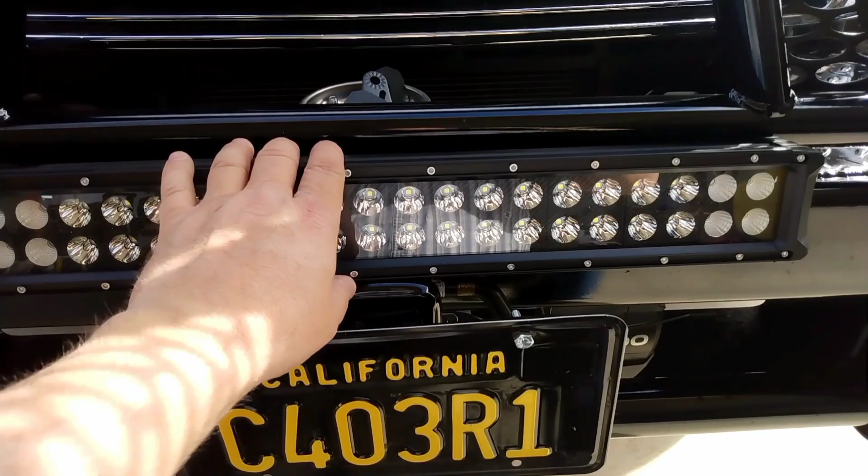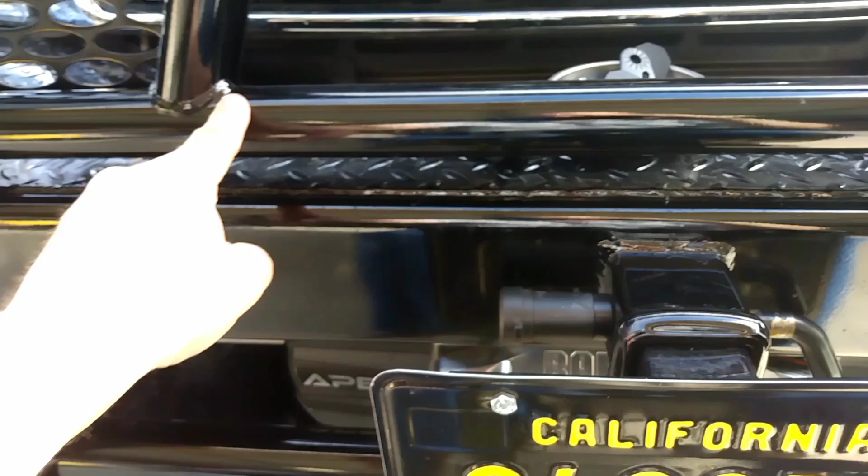Figure out a way to mount it to this. I don't want to drill into here. There are no mounting locations for a Lightbar on this. Kind of curious why they didn't design it with some sort of universal Lightbar mounting tabs. I don't know.

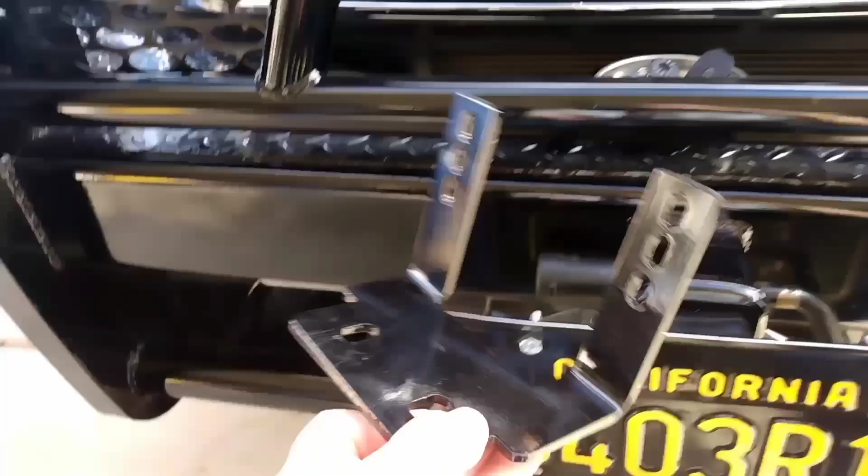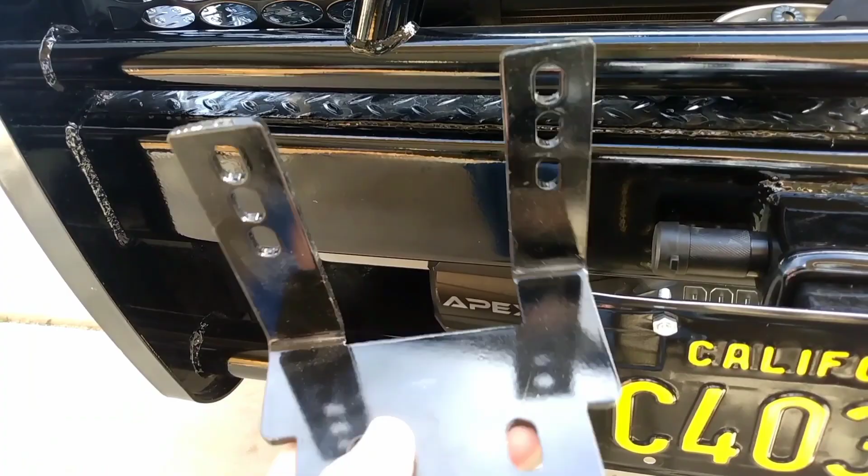Okay, this is all the parts that it came with. Well, let's just leave them right there for right now. So my thought is, I have these leftover brackets. Now these brackets were meant for the LED fog lights. It's a special mount for the LED fog lights. I don't have LED fog lights, so I don't need them.

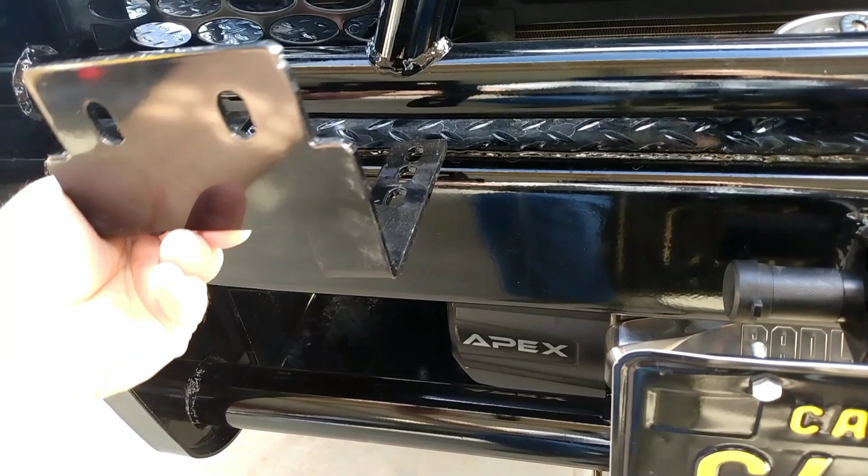So I'm thinking about notching. This would make a nice little L bracket. And then I could notch a little piece. Of course, I'm just going to cut this off. And then it would make a nice little L bracket. I could bolt it to here on either side, and it just might work. So that's my thought on that.

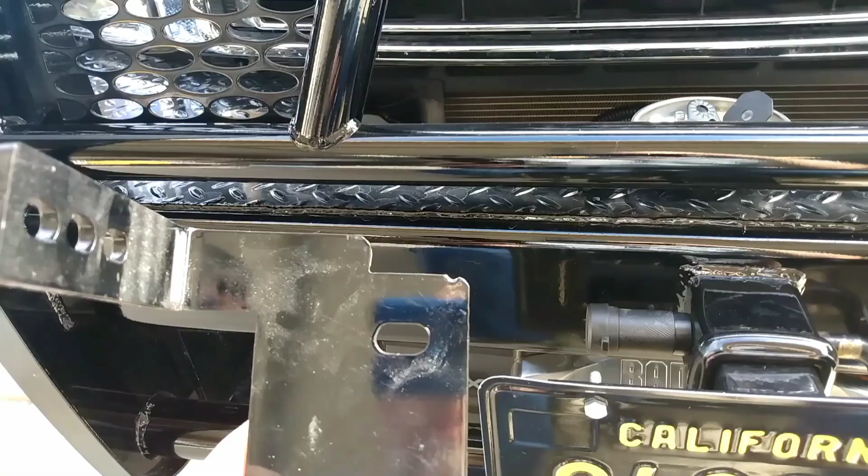So let me get going on doing that, and I'll be back.

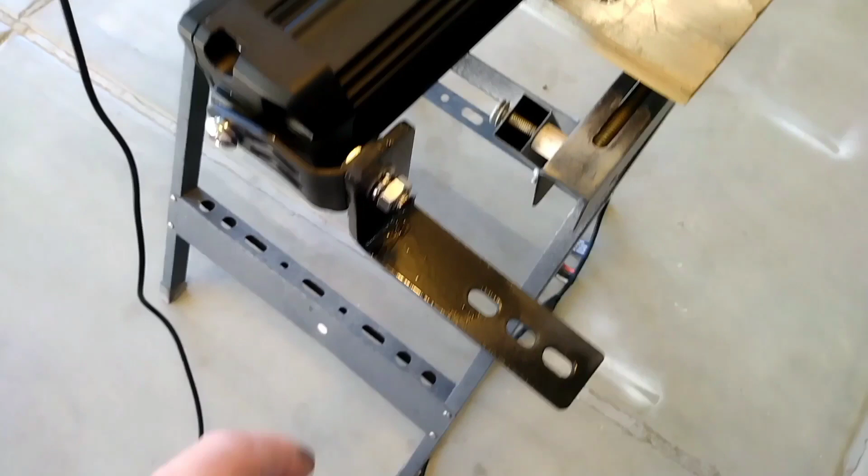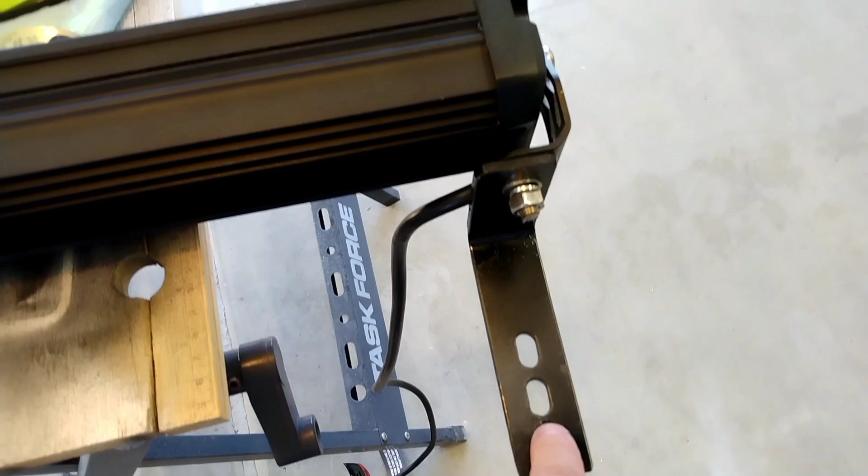Okay, so here's what I have fashioned. These are the bracket pieces that I cut out of the leftover brackets from the bumper install, and then I've installed them to the brackets that came with the light. And then I'm going to drill a hole in the bumper and then bolt this to the bumper. Same on the other side, and it should go in just right. All right, it's all bolted up.

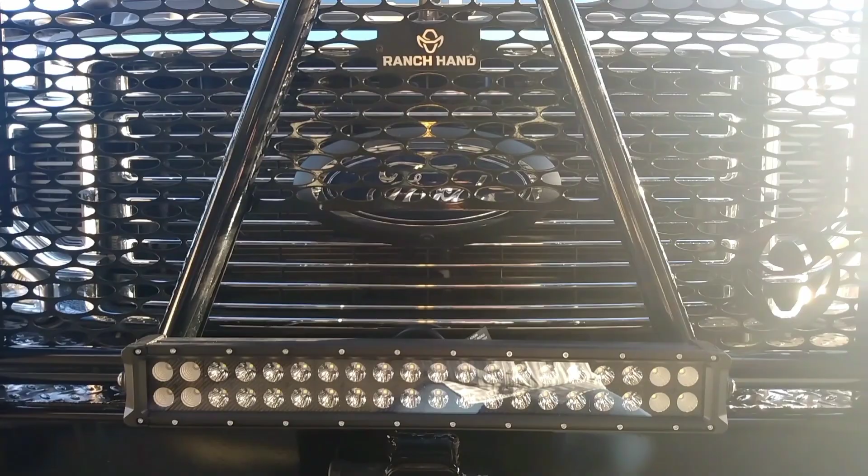All right, now let's get it wired. My upfitter switches are located down underneath of this fuse box here. I just pushed in the two tabs, and it comes right out.

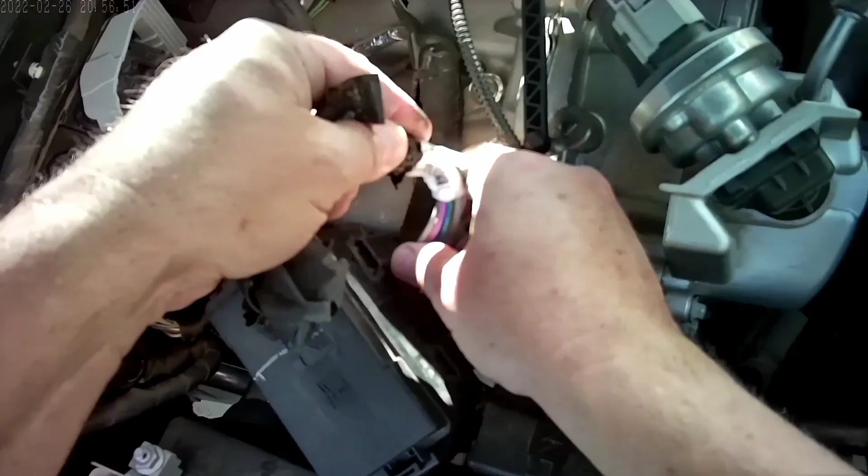I'm guessing that, oh, there's more line here. Looks like there is. Oh yeah. Okay. Not a whole heck of a lot, though. Not a whole lot. That's okay.

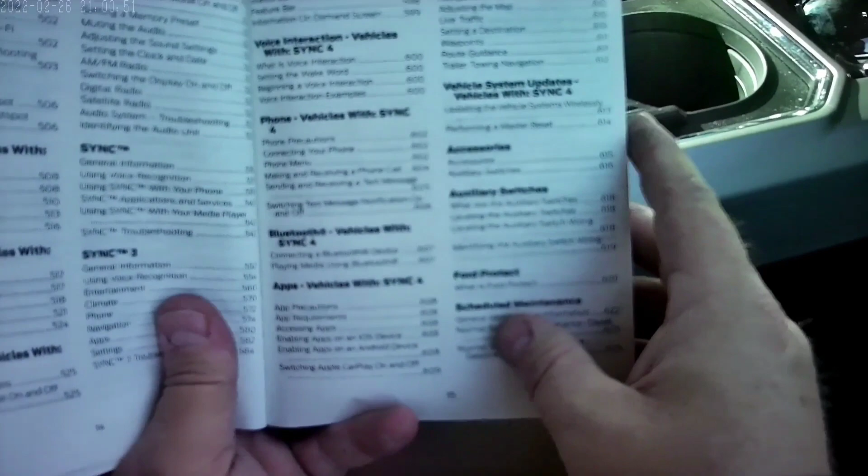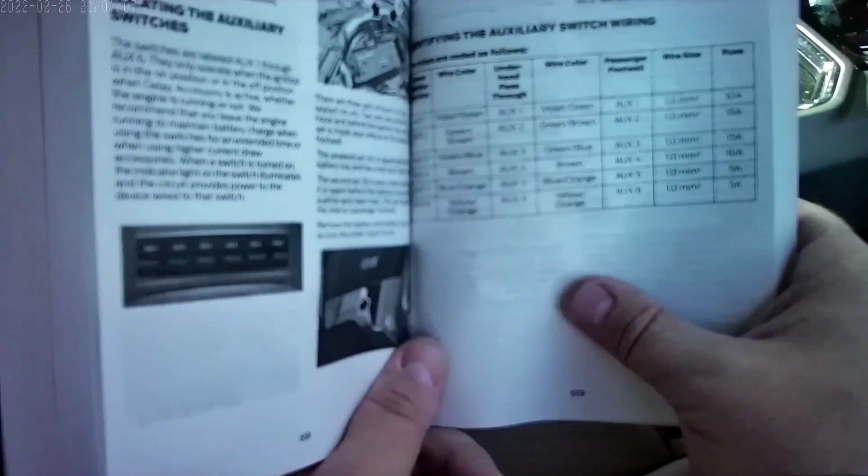Break out the manual. Auxiliary switches. Identifying the auxiliary switch wiring. Locating the auxiliary switch wiring. Done that. Okay, 619. Okay, auxiliary switch.

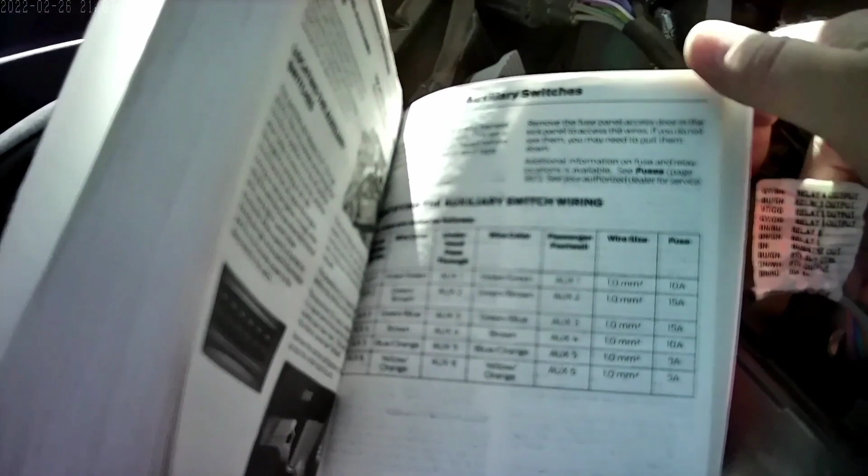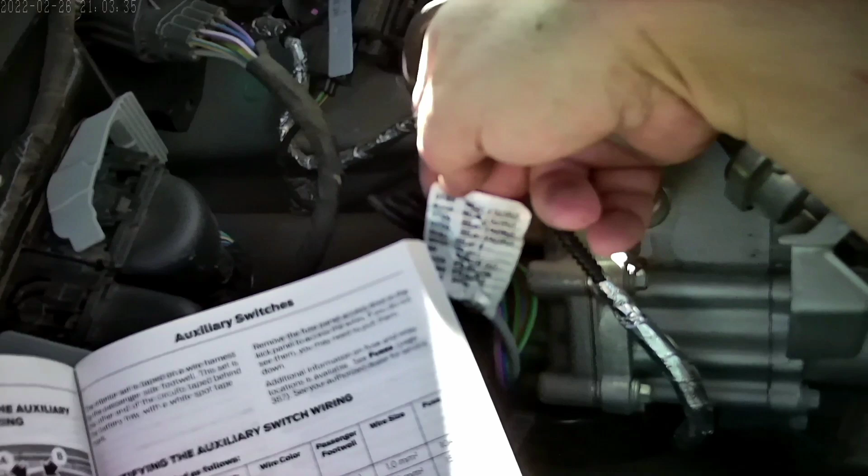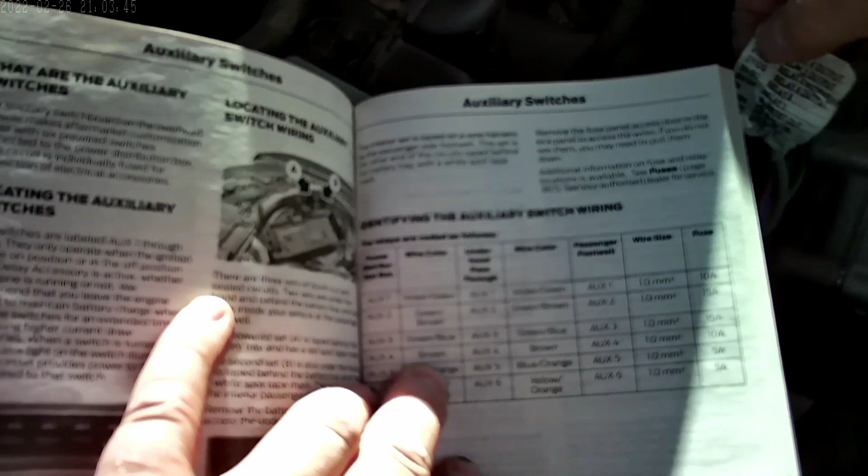Violet and green does not match up with auxiliary 1 in the book. Relay, what's brown? Relay 4 is gray and brown. Aux 2. Violet, and that says green and brown. This doesn't make any sense.

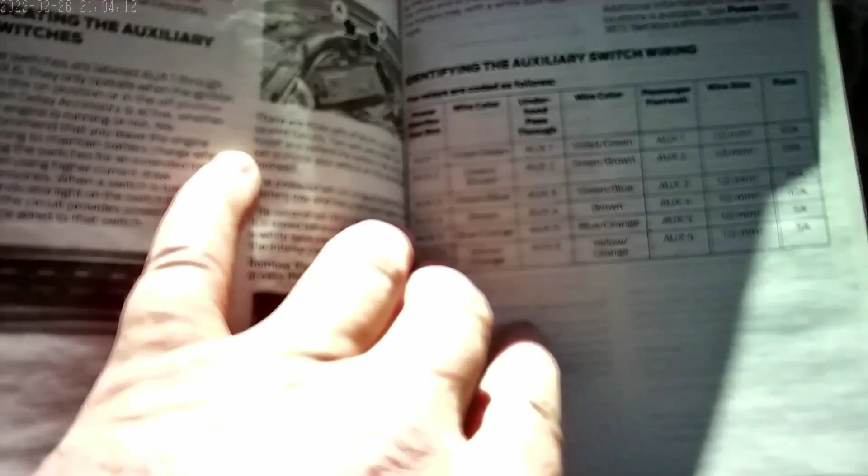Brown and green. This is violet and green. Well, AUX 1 or AUX 2, I can use AUX 1 or AUX 2 because either of those are 10. I could use any which one of them.

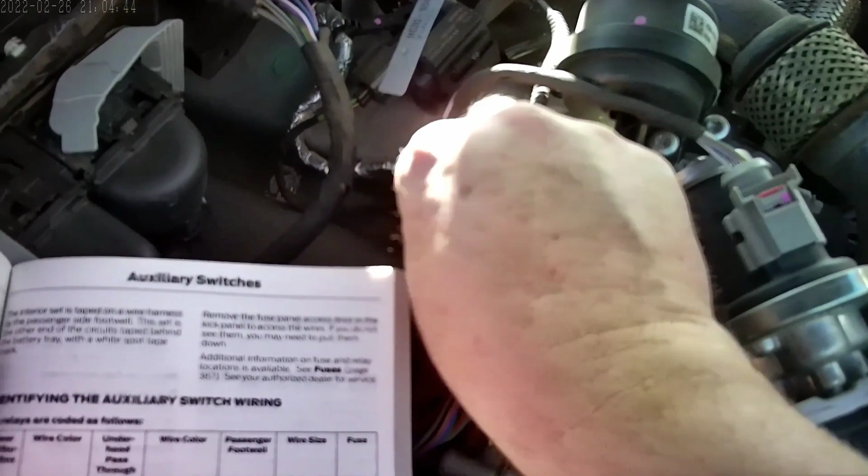Well, I'm going to go off this sticker. So relay 1 is brown and green. Where's the brown and green one? Brown and green, brown and green. There we go, brown and green. Any other brown and green ones? Nope.

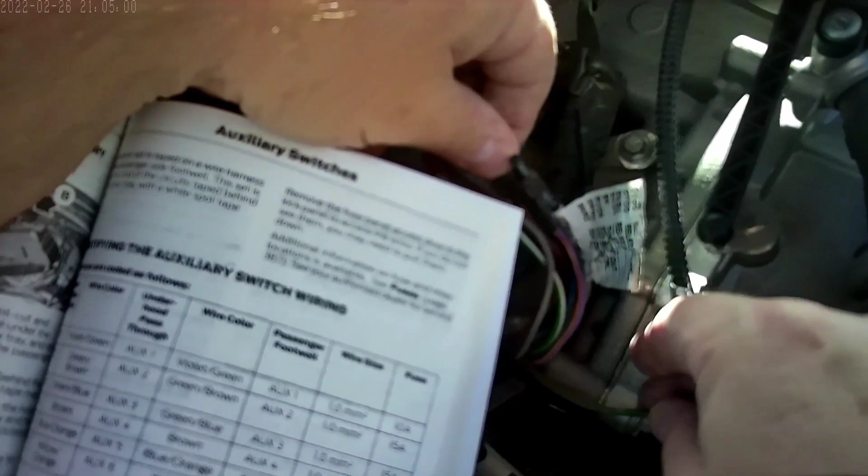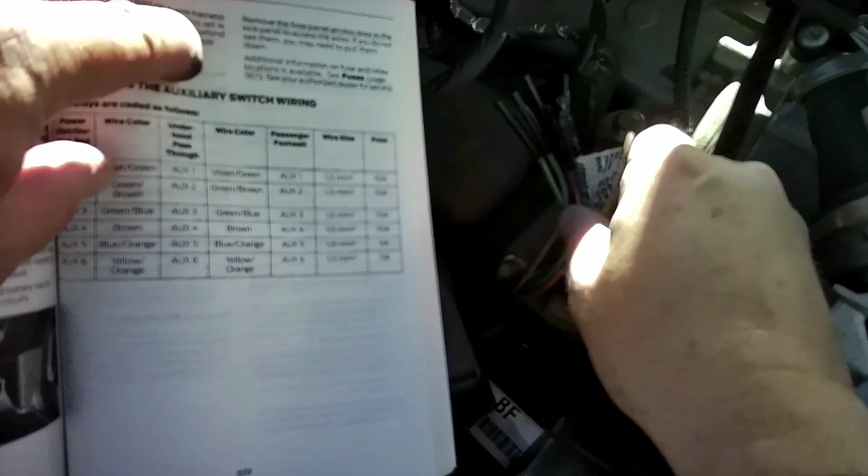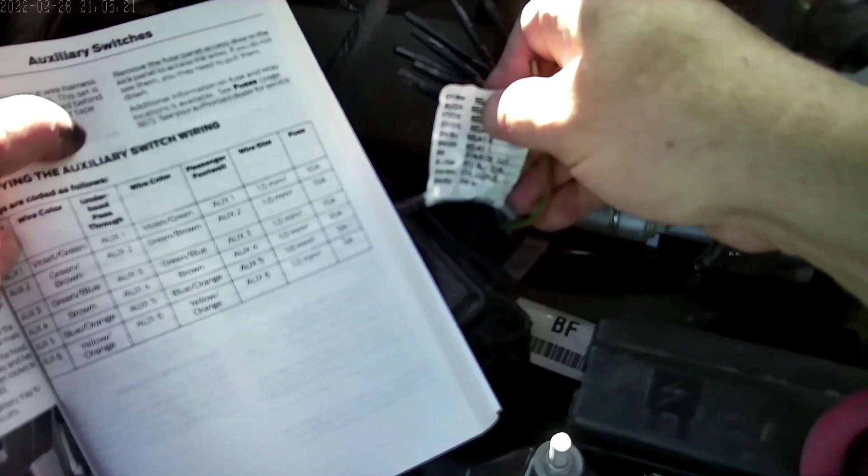Solid brown. That is brown and green. So that's supposed to be AUX 2 in the book. Brown and green. But in here, it's saying brown and green is relay 1. Book saying it's relay 2. All right, well, we'll try brown and green.

It's saying there's a violet and green in here. I don't see a violet and green. Huh. Well, an orange. Oh, OG, orange. Duh. Violet and orange is relay 2. Blue and orange, yellow orange. Violet and orange. There we go.

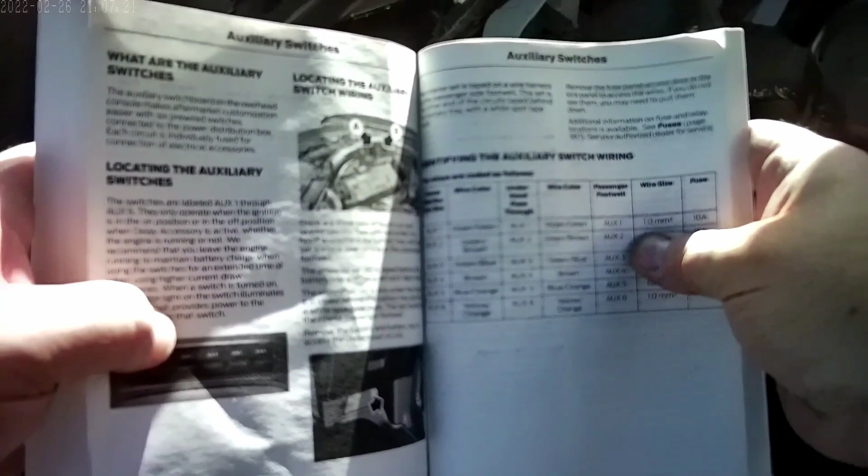That's relay 2, right? Yeah. Okay, this is 1, this is 2. No violet and green, so I wonder if this is not updated or something. Interesting. Okay, we're going to go off of that.

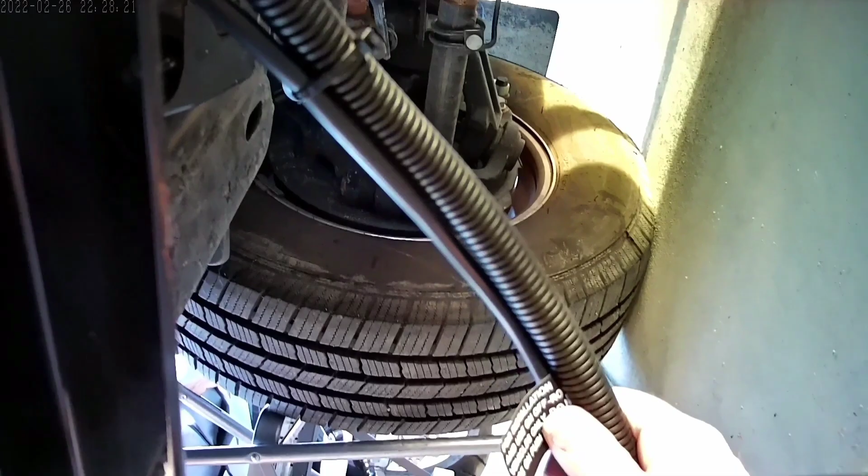Okay, I got the power cable for the spotlight, wire loomed, and I'm attaching it to the cable that will power the winch, and I'm going to route these up at the same time. I'm not wiring the winch right away, not yet, but figuring out where we're going to put all the wires.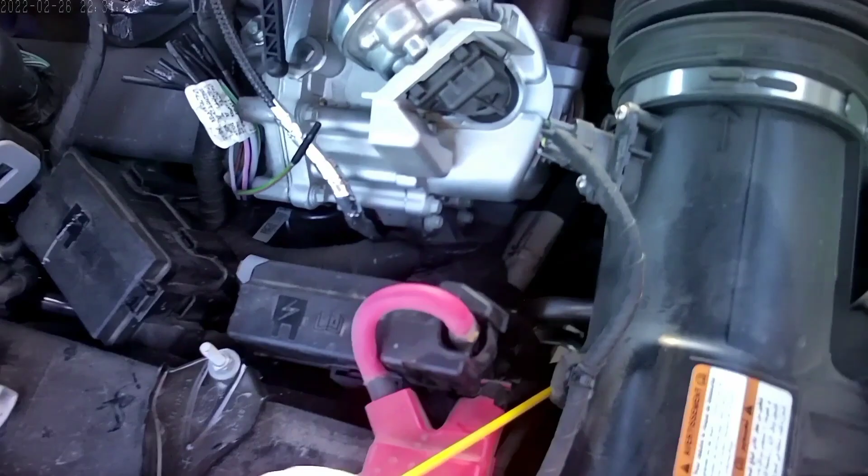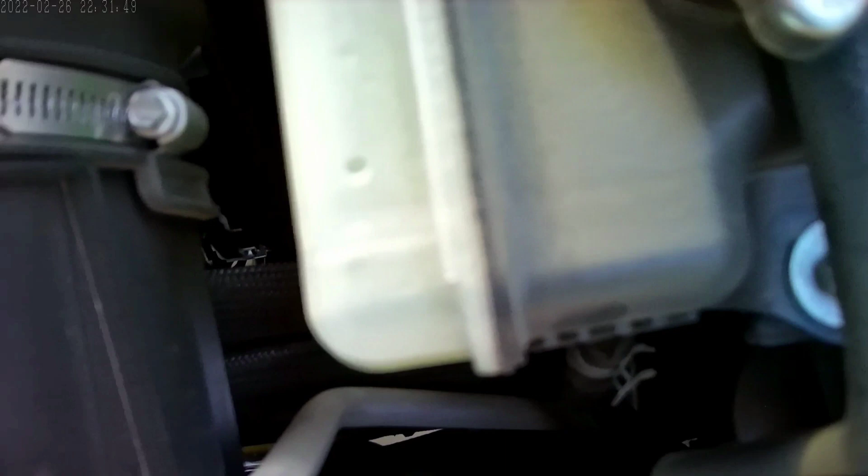Looks like there's a routing right here somewhere. Okay, let's try that.

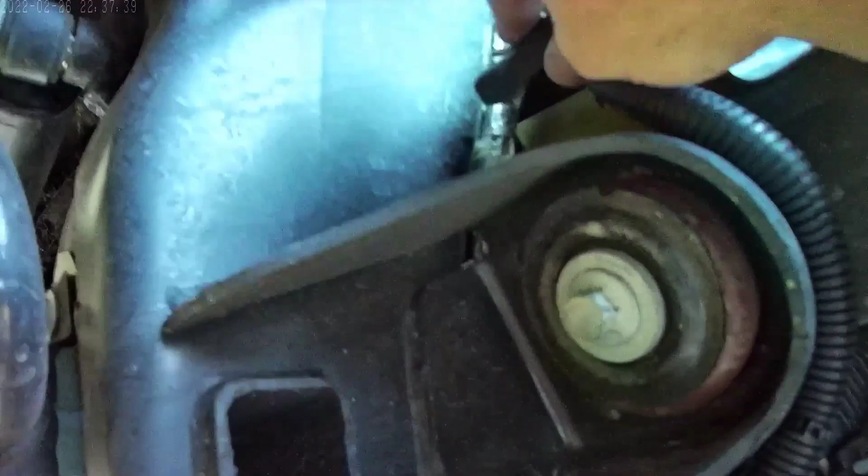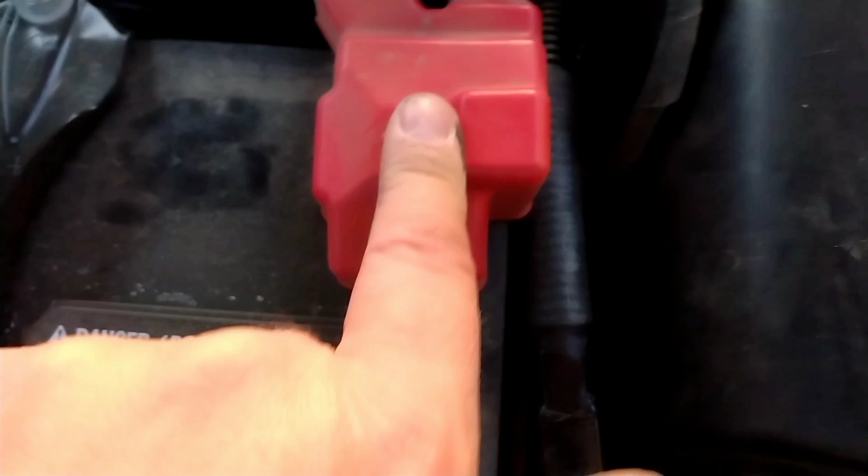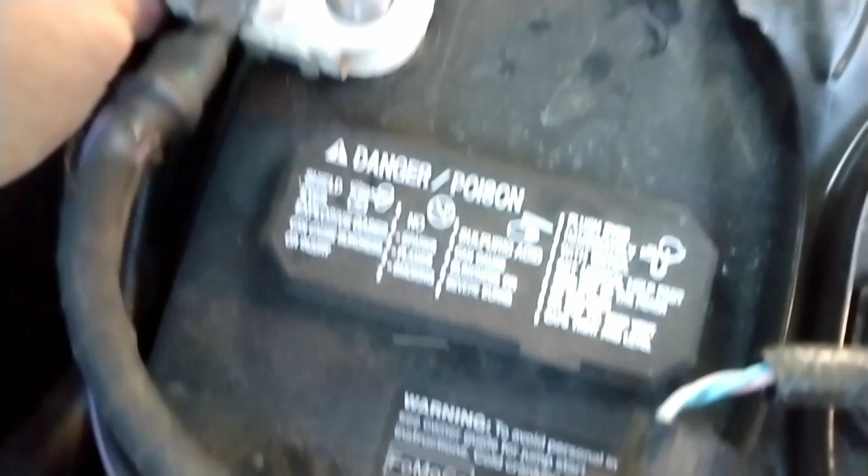Okay, I got the wiring for the winch and the light running up from underneath. I got the winch wire right here, plenty enough space to go to the positive terminal. And then I have the light wire running in wire loom all the way around here. Got it put to ground here and then tied into what is switch number 1 according to the tag here, not what's in the book, because I think that's wrong.

All right, let's test it out and see what it looks like. Okay, the switch is not on. It takes the accessory to turn it on. Boom. Oh, that's bright. Nice. Oh, that lights up a lot. All right.